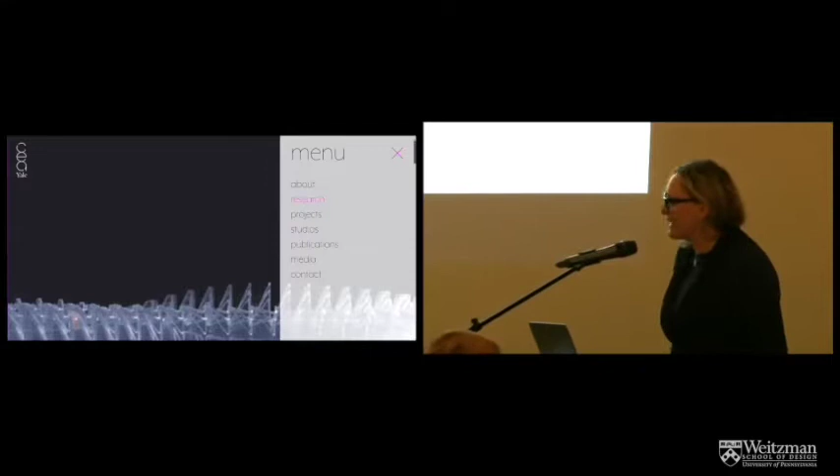Part of my mandate was really to introduce our new program, Yale CEA, the Center for Ecosystems and Architecture. We just changed the name to 'and Architecture,' but not in time for press. Yeah, it's one of these things when you have a startup. We haven't formally launched, but we would love for the folks at UPenn to know about us, because we consider you absolutely kindred spirits in so many different ways.

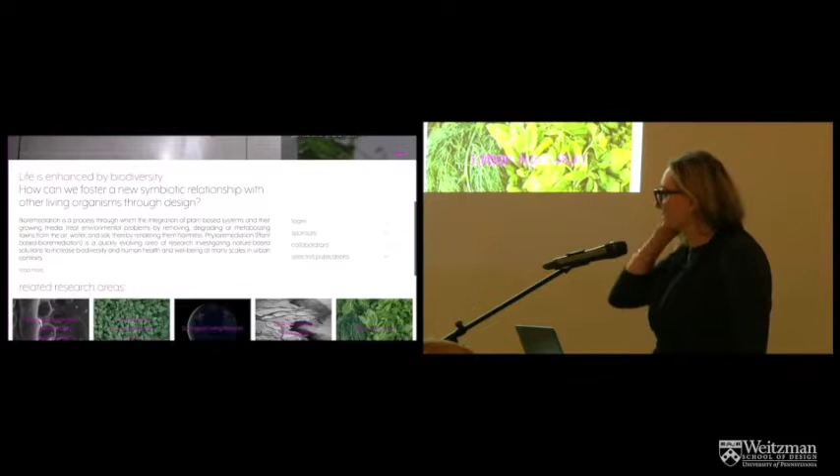So what are we trying to do here? As Vinka said in that incredible introduction, thank you so much, it's very comprehensive. In a nutshell, we're linking research areas that are ecosystemic with building projects. There's a relationship between scales where we're leveraging building projects in order to, as Vinka used the term, radically change something on an ecosystemic level, which is very hard to do within the budgetary and time constraints of practice and even of studios. We can change certain aspects, we can plug in certain components and parts, but to actually effectuate ecosystemic changes is extremely difficult.

But we still need the buildings, and this is why we're continuing what we did at CASE, per Vinka's introduction, to form an academic-industrial alliance in order to have multi-scalar and ecosystemic testing across a lot of different labs simultaneously, with data acquisition and lived experience in actual building systems. A lot of times, these are actually pictures from our old center, CASE on Wall Street, which was at Skidmore, Owings and Merrill.

What can we do with building and testing our systems? We have the so-called DNA of the built environment, and we don't mean it as a metaphor. We're serious about the fact that we need to start looking at even our mechanical and electrical systems through the lens of living systems behaviors. We have all these artifacts, and I'm going to talk about that towards the second half of the lecture.

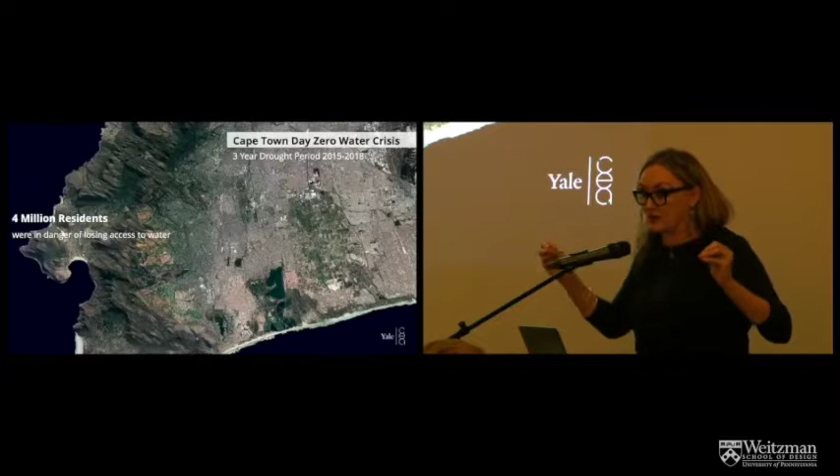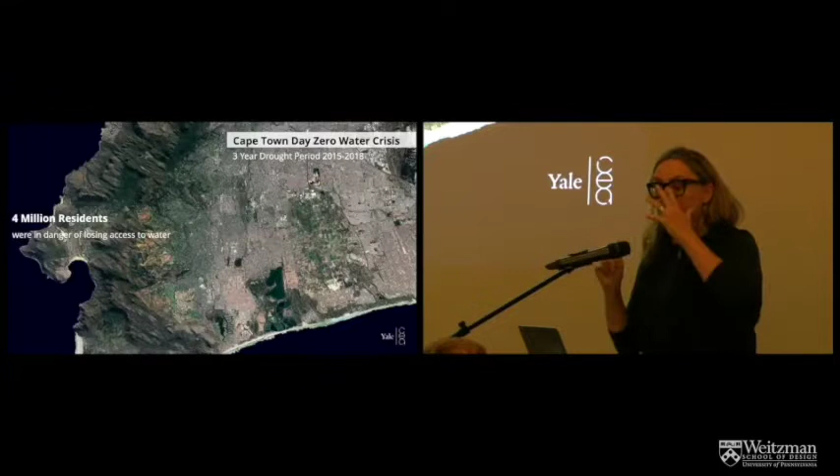I'm going to show this as a provocation just to show that we are always working with sites. As you all know, in architecture and ecology, we always have to think about the absolutely specific condition of sites. We also work generically, thinking about prototypical conditions that become transferable across sites that are very different.

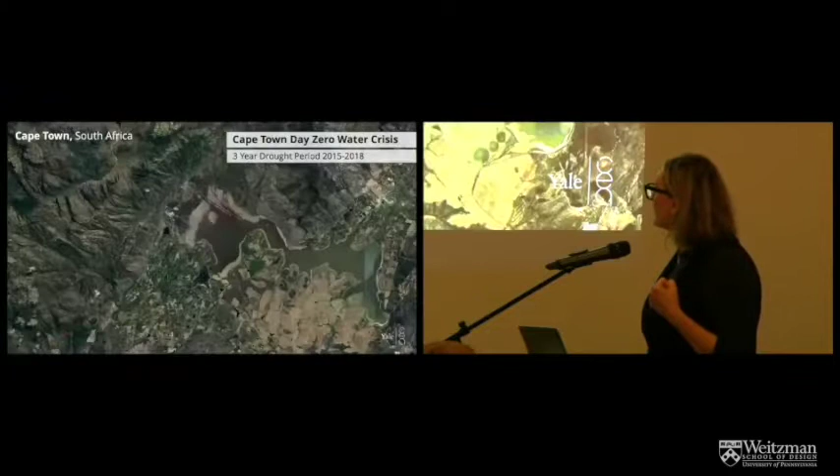In the context of Cape Town, we can see that a city of 4 million came very, very close to zero water, literally. Over the course of a 3-year period, the dependency on surface water conditions went from the upper left all the way across to the lower right. It's a massive change - imagine that within 3 years we have an ecosystem that will transform that quickly, one that 4 million people are completely dependent on for sustenance.

Cape Town is typical of a contemporary city where some of the residents - I don't know exactly what percentage - do have access to water piped into their residence, but we can see on the left-hand side there's a great variety of access to infrastructure. On the upper left we'd see a lot of access to infrastructure; on the lower left we'd see informal settlements that typify global cities worldwide, where you have tremendous rural-to-urban migration and inadequate infrastructure for sustenance.

And yet, in the run-up to almost Day Zero, it was narrowly averted. They ended up getting some water in and replenishment of the water table at a certain point, but we're talking only a few days.

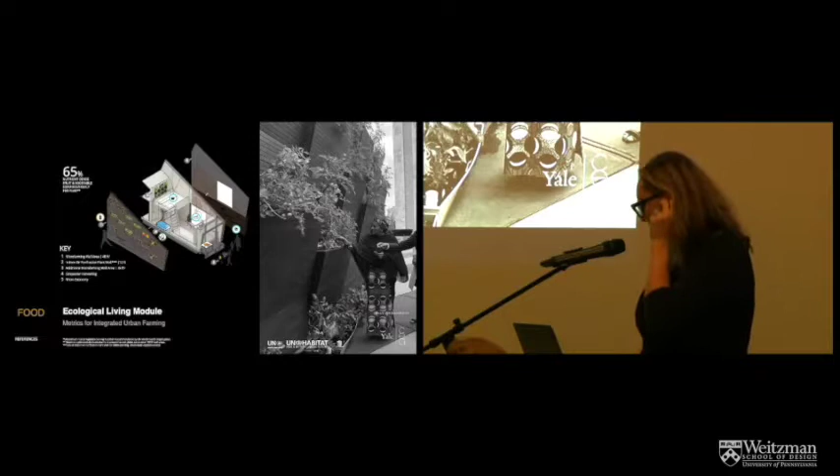This is just an example of an ecological living module, which I'll show you in a minute, actually geared more toward New York City. But in this case, we can see farm walls—this is backwards—that are used for all of the plant-based processes we're working with: purification of water, purification of air, delivery of food, in some cases delivery of disinfectants like hydrogen peroxide or other things, and of course the delivery of medicines.

So if you can see on the bottom, a lot of these very common plants, like St. John's wort, are ancient medicines. In Italy and Germany, and a lot of places, they've been using them for centuries, millennia actually, for certain conditions.

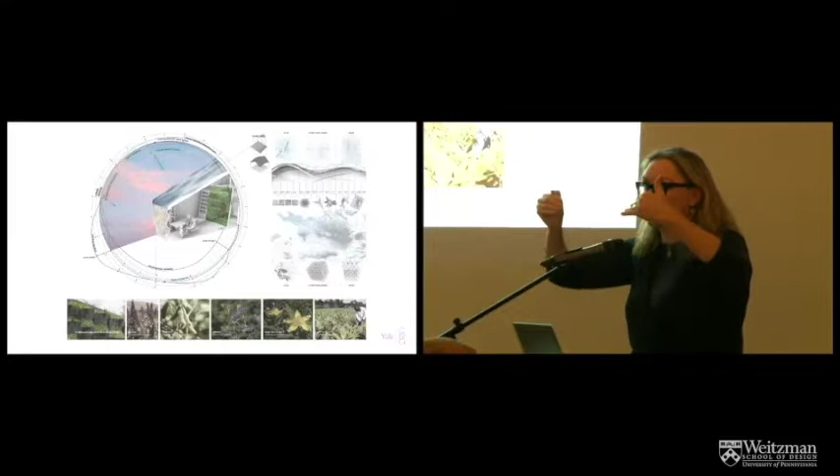But what we're doing here is, if you see like a fragment of an ecological living module, what we're always looking at is completely reimagining the interface between interior and exterior, no matter what climate we're in, even in an extreme climate.

I'll invite everybody to think about where their oxygen is coming from right now. Fun fact that we don't think about a lot, but please do think about it for a moment. That's a trick question I'll ask at the end. We can talk about that.

But basically, the whole idea is that we can test systems and materials. In the case of Cape Town, what we need to do, and what you're seeing on the upper right, is converting aquaculture waste from shellfish and other types of waste products in order to put into hydrogel-based systems to absorb water from the air. Cape Town is a good example of many climates worldwide, even in Mumbai, where we have big monsoons for nine months out of the year. That moisture is hanging in the air and is not coming down, and we need to be able to get that moisture and deliver it for potable and domestic water, as an example.

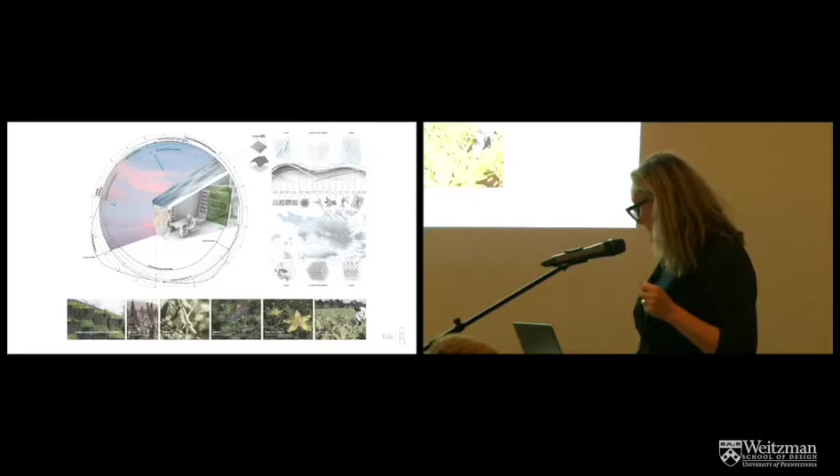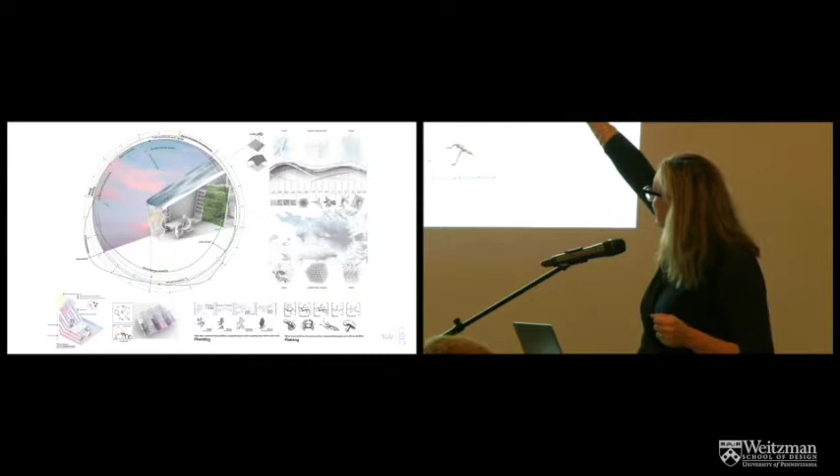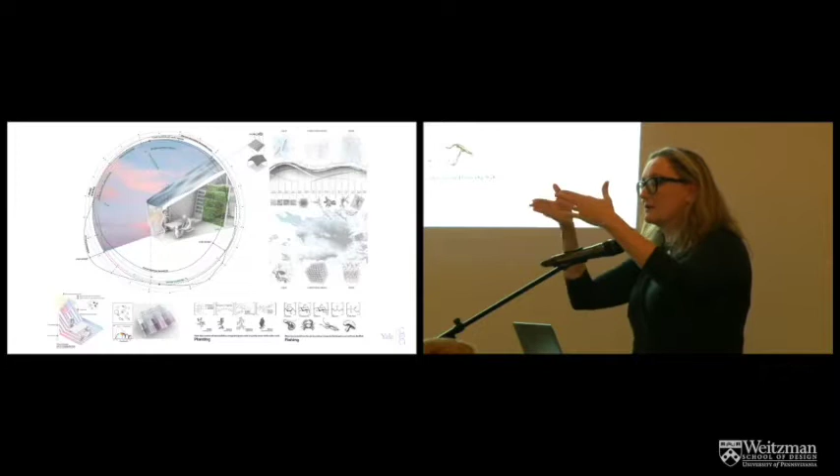And so how do we take, for example, these plants, like on the right-hand side—those are the sources for the hydrogels that are tested alongside that roofscape and absorbing it. The plantings in this particular case are going also into either roof, membrane, or facade membranes in order to work with solar in order to purify.

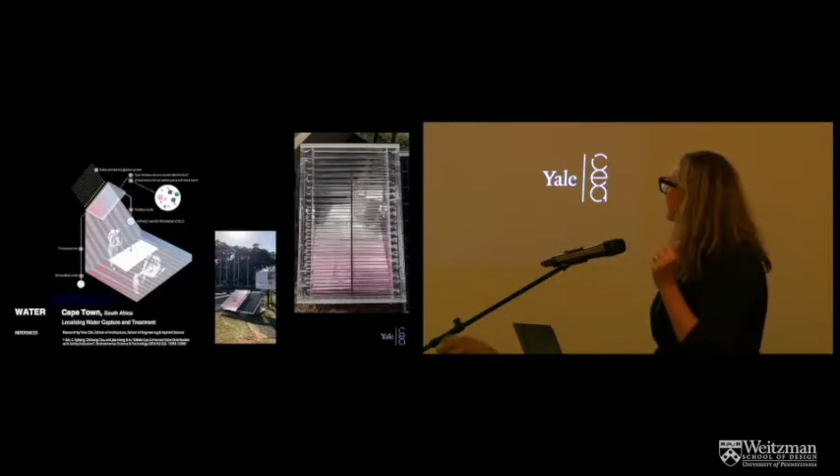And so we also do some really down and dirty prototypes that are not necessarily always that beautiful, but this is a good example on the right-hand side where we were demonstrating this in Cape Town. This is the purification of water just from the plant and the solar without any additional energy.

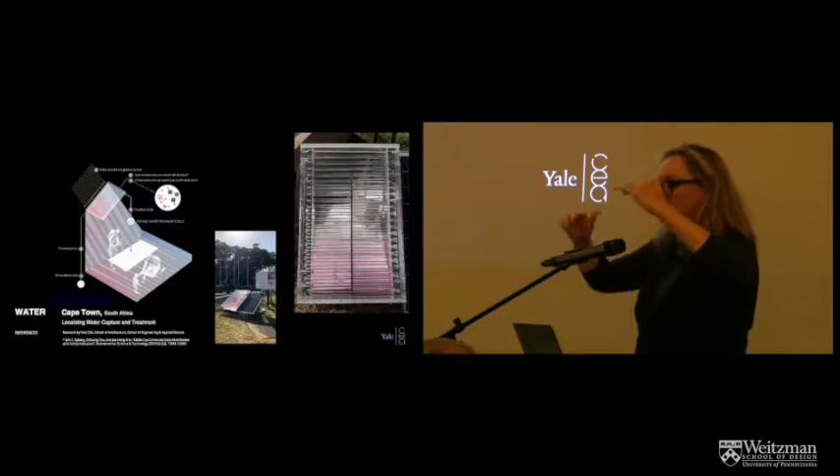And this one is using pumps and solar panels, but more recently—and we will be publishing this fall—a new system that doesn't use any external energy at all for the purification of water.

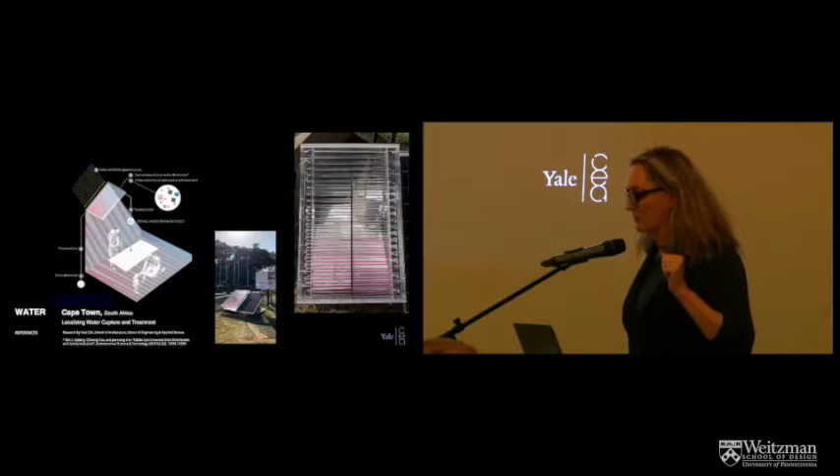And one of the things, obviously, if we're working in this context, is we have to work towards extremely low cost systems. So tubes and other things like you see here will probably be too expensive. But this is an earlier prototype that we showed and demonstrated also on the roof of the ELM a few years back.

A lot of times it's hard to show what can happen with an ecosystem, and as I said, we've got a lot of Frankenstein hybrids.

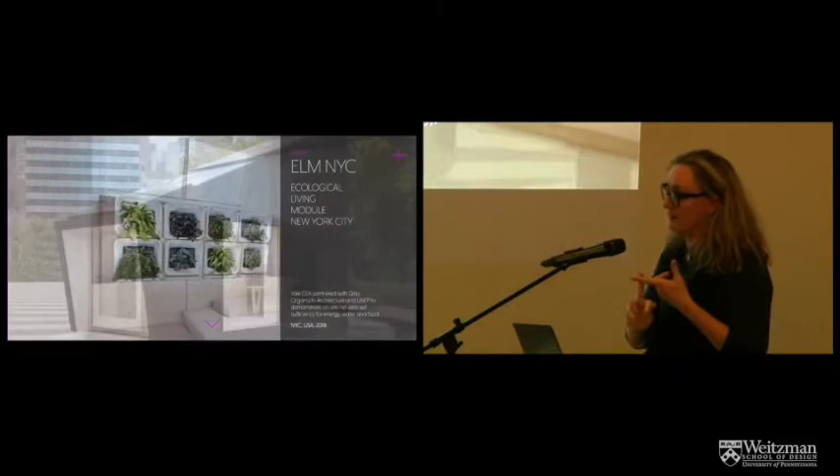This ELM in New York City, for example, is just using scrap, CLT, and other things that we had with Alan Organschi, Gray Organschi, and looking at how we can just make a very simple module that really can provide energy, water, clean air, clean water—actually purify the water—and enough food for a family of four. And in this case, literally, we're talking about 195 square feet, or 20 square meters.

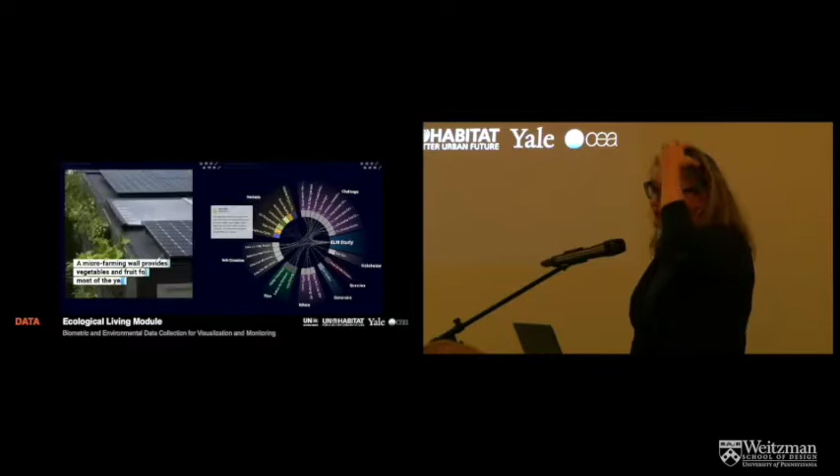That's the size, unfortunately, that is given to us by the UN. But we showed them, and this is like on the plaza in New York City as a kind of demonstration. We're not saying this is a solution by any means for anywhere, except that one moment of demonstration at the UN. So I want to be very clear that it's really important we're not saying in any way that you can transpose from one condition to another—that would be really extreme with bioclimatic design. If we really are talking about net zero, if we're really talking about sustenance, then there's an interfacial exchange across the building envelope that is absolutely geared to that one condition.

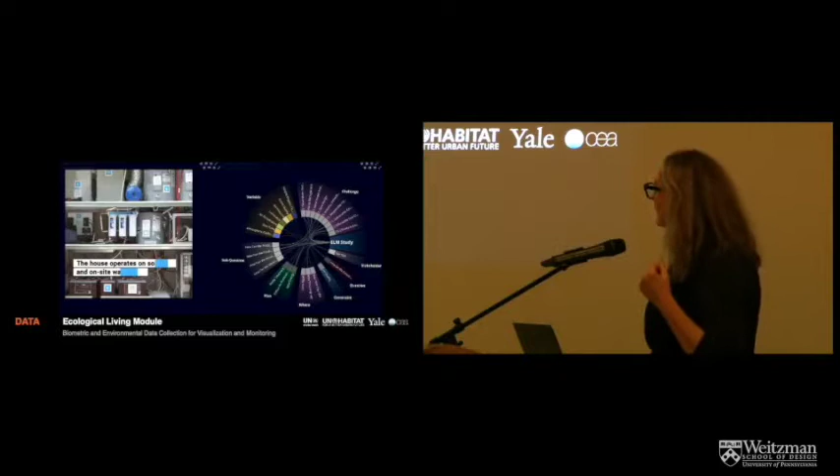But of course, we take a lot of data. We take a lot of data from human beings. How are they doing in this space? Where is all the material coming from? What is the life cycle? What is the impact on forests?

Fortunately, at Yale, we have an incredible School of Forestry that is now the School of the Environment. They changed the name too, recently. A lot of people are doing it these days.

But they're really looking at that interrelationship between, if we were going to go replace that concrete, steel, all of these things with bio, what happens when we scale up worldwide? There's a lot to think about there.

We are testing always incumbent systems with emerging systems. What you can see on the roof is a new system, and I'll talk about it a bit when we're looking at materials. I encourage you, if you're interested in solar, we have multiple systems, but this one is currently testing and we just demonstrated over 75% combined heat and power in renewable energy. The important thing is it's also modulating daylight and taking heat out, so it's passive and active.

When we're thinking ecosystemically, we're never thinking about something that's passive. I'm going to talk about this slide later on, so I'll just skip quickly to that.

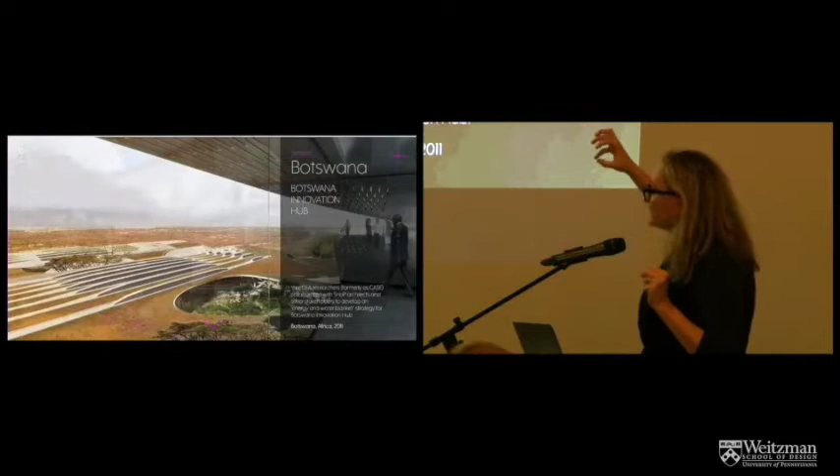If we're thinking about that context in South Africa and scaling up in a similar ecology - here this is Botswana, also quite water scarce, where we were working and there was no grid - this is where we leverage our relationship with AEC partners, in this case Skidmore, Owings and Merrill architects, to really look at how can we, once the train leaves the station and we've got to deliver a building, or in this case almost a district, really change the relationship to natural ecosystems.

Here we had incredible partners with the clients, because they literally did not want to tear down any trees. Their relationship to this landscape was profound, and we learned a lot from it. Here's just a rendering - we were working at the schematic design phase.

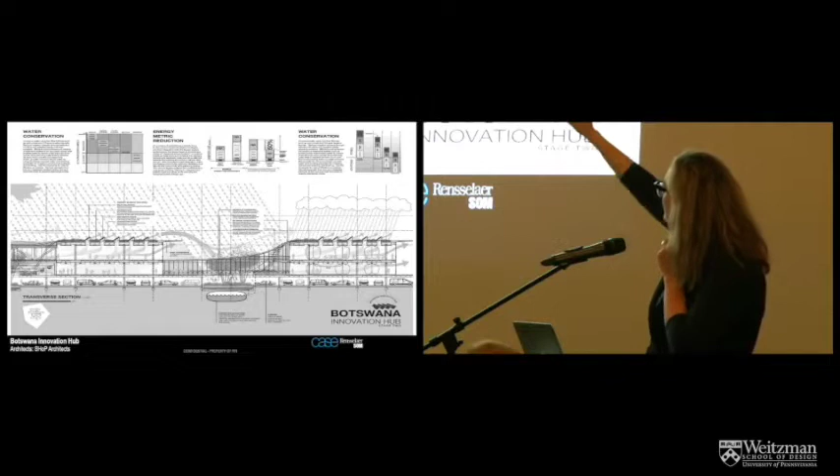We were lucky to talk to the architects and interface with them on the concept of an energy and water blanket, where the savanna would basically be pulled across, with pools of bioretention throughout. These clerestory windows also contain that solar facade system I just showed as a concept. You can see in a very early section this idea of the relationship between the energy and water nexus and what we could do with even intensifying it.

So you would have more water within these courtyards, preservation of water, and the growing of certain species because of being able to collect or concentrate water. You can see those in these clerestory windows, where we were visualizing that solar facade.

Unfortunately, that's under construction right now, and we're not scaled up with this technology enough to put it in these clerestories just yet. But what I learned so well from Skidmore, Owings and Merrill, working with the engineers - especially Bill Baker and others there - is that the architect probably wants to get every idea into one building. The idea was, if it's research, we leverage one building, and maybe it'll be three buildings later that we're able to get it into. I think that's a really, really important thing.

I'm showing those because architects increasingly want to read a lot of the scientific journals, and food for thought: the way and format in which we have to show a lot of that work is difficult for us. There's a lot we need to think about in terms of format and presentation, being able to, in a good way, learn each other's disciplines a bit, and have maybe more of our visuals and more of their metrics in the way we represent things.

But I think, like so many centers, we are working globally, and we work with AEC partners that work globally, and we can see this massive transformation of regional biomes.

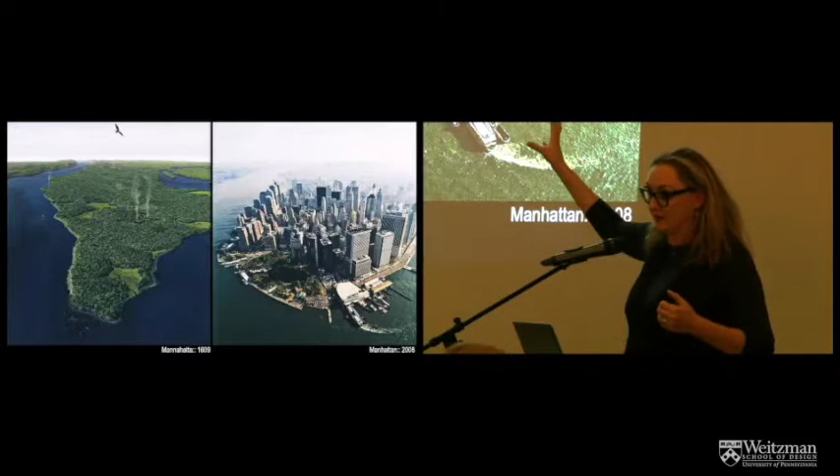It's very hard to live there for a lot of species. But if we look at the surface area, and all the different opportunities for niche conditions or other formations, we could potentially have net positive biodiversity in the city with this particular carcass, a pre-living carcass. We have humans and their parasites mostly here, and then radically cut definitions between where we designate that other living species and systems can coexist, very neatly defined.

But what happens when we start to actually design through the lens of other living systems? And what happens when we look at our own ecologies differently? This is called the global light pollution map on NASA's website, and of course this is a still from a live feed. But what if we think about that as a map of potential nighttime photosynthesis?

We can look at our things in very different ways, look at our artifacts differently, and we don't have to think about this either-or condition, either we are in ecosystems and non-human living systems as we've called them before. We can see that non-human is a term constantly used in our anthropocentric view of things.

But what happens if we start to think about a continuum of the ecologies? On the left-hand side, we have a massive degree of carbon mopping and sequestration with natural systems during the day, but we've also created a kind of diurnal condition where we have a tremendous amount of internal light and other things.

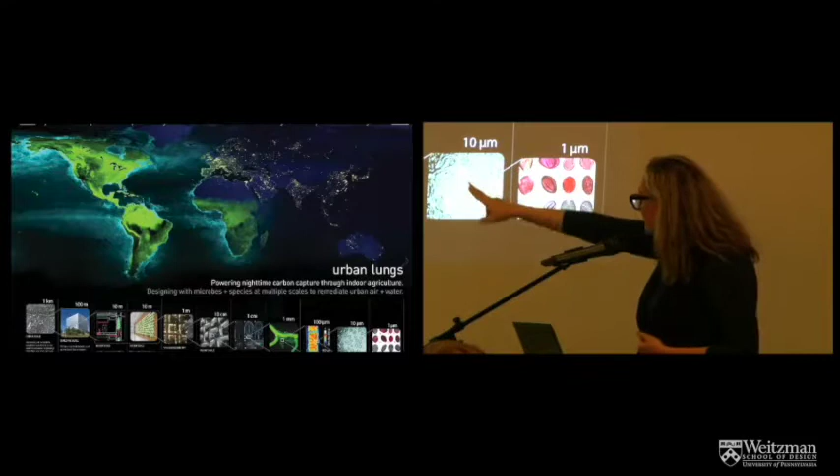If we look at design on a multi-scalar level, on the left-hand side is the project in the Bronx that Vinka mentioned, and we're starting to think about partnering, once again, with designers at each scale.

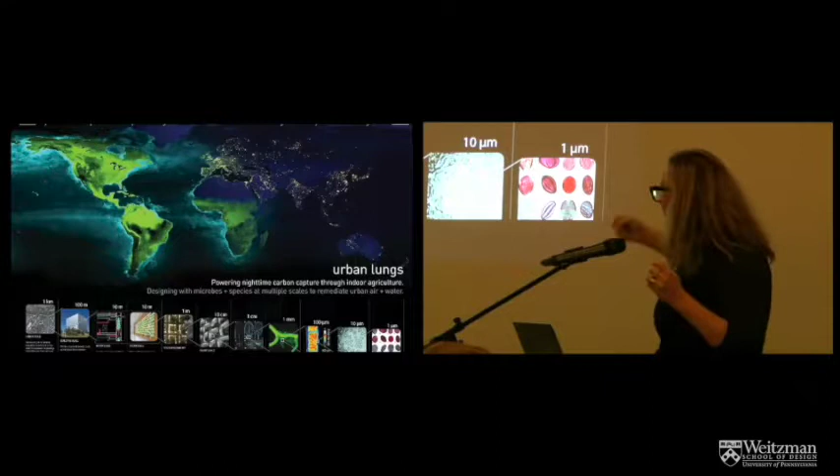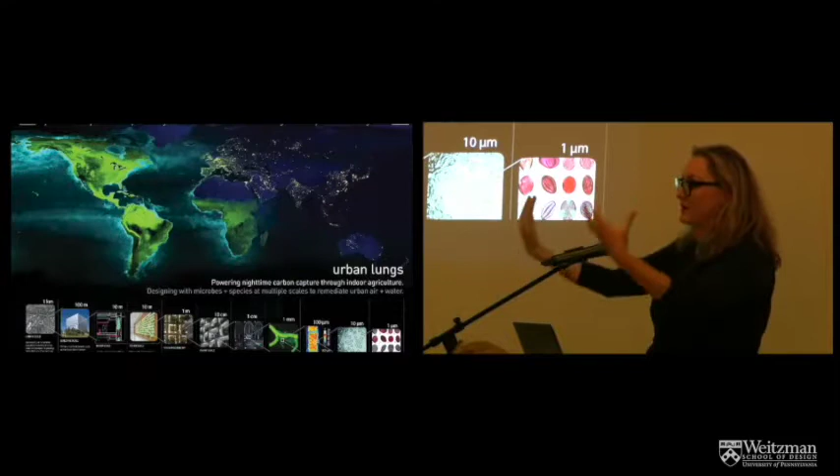We have designers of microbial ecologies in biotech, and designers of other mechanical and electrical systems. But if we start to think about that co-design, not just with other living systems but also across the disciplines, there's a way to think about our ecosystems very differently.

On the left-hand side is a section from a system we developed with Skidmore, Owings and Merrill many years ago, when I was at CASE and RPI. It's been evolving in terms of its morphology over the years, very slightly each time, through so many different criteria: airflow criteria, microbial criteria, soil design.

But at the same time we're evolving morphologies at that smaller scale, we're also inhabiting buildings that could be considered the epitome of a mechanical and electrical paradigm. Going back to this theme of ecology of fear, this Public Safety Answering Center Two was the building New York City built during the Bloomberg administration to be the redundant building in case we have a bioterror attack, a Fukushima, or a 9/11, since the command center for New York City was in the base of the buildings when they got hit.

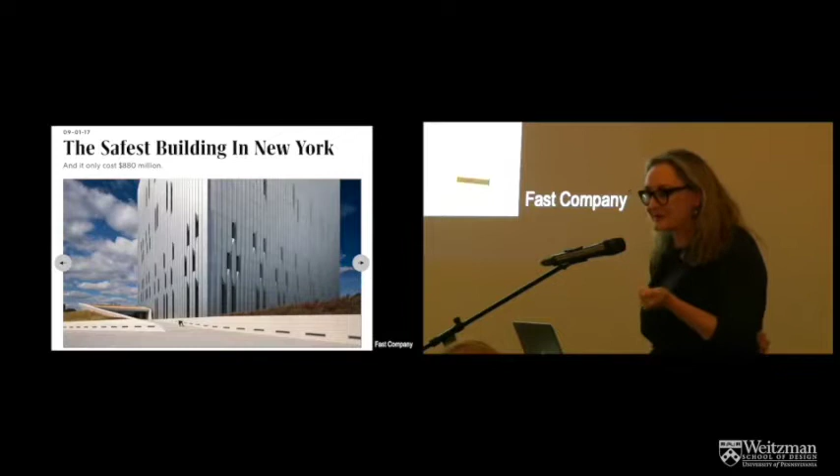I love this title from Fast Company, the safest building in New York. And you can imagine why they call it the safest building. It's blast proof.

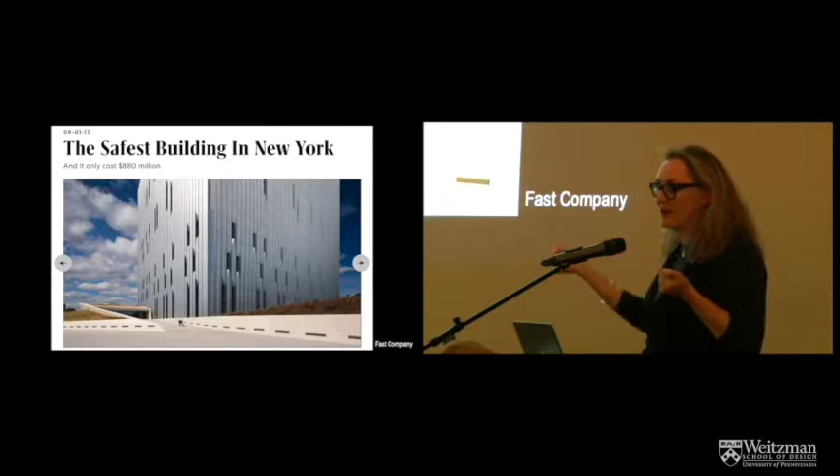You can shut off the fresh air intake in case of a bioterror event. It's got numerous safety features.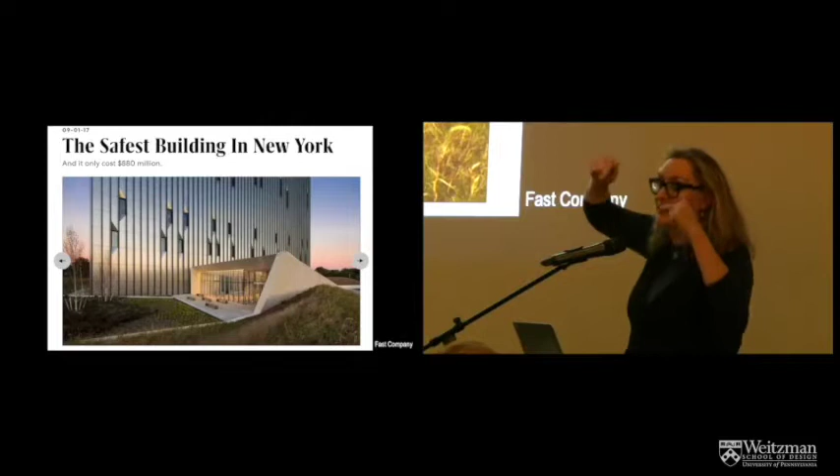Out of that 880 million, initially the budget was 1.2 billion with a B, and during the recession in 2008, it went all the way down to 400 and something million. We were shocked that our little piece of that was still in the budget. Why was our green wall still in the budget when the police and firemen did not have any lockers at one point? Now they do, thank goodness.

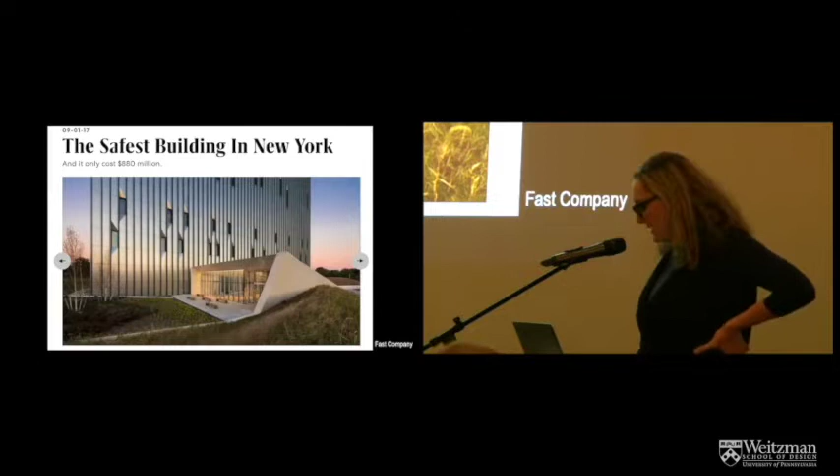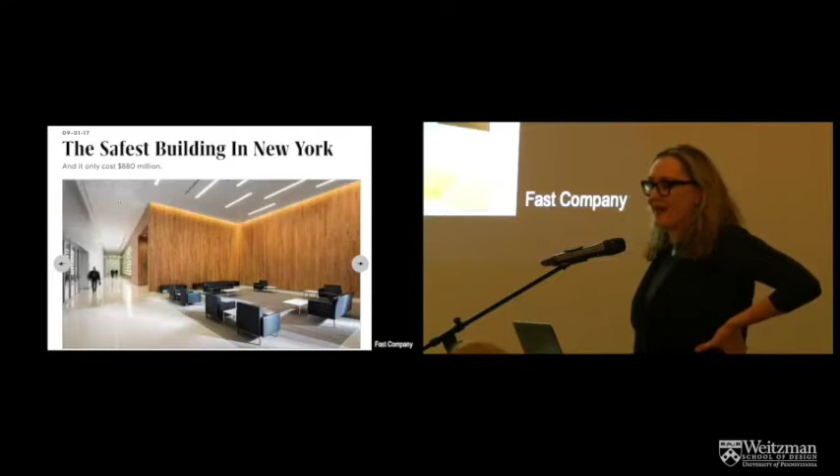We had a discussion very early on with the police and firemen, and we talked about air quality. The architects did not want us to talk about anything nasty, they didn't want us to be negative in any way, quote unquote. But we slipped in one slide with toxins, which I'm embarrassed to say I don't have here. But I think we know now, 10 years later, post-pandemic, we know everything that's being emitted here. We know that we're exchanging microbiome with everyone here over the course of an hour, so I'll try to keep my lecture to an hour.

We obviously have a tremendous amount of source emissions coming from the outside. We're mixing. Our air inside is only as good as our air outside, of course, as we know. But really what we were interested in here is, wow, they have to shut off the fresh air intake in case of a compromised event on the outside. What does that mean? How long do you think we can last on the inside of a building like this if we shut off the fresh air intake?

It's related to my earlier question about where our oxygen is coming from. Any guesses? Throw it out. We won't know who you are, so... two weeks? It's good, you would think we would be able to, right? Yeah, a few days. Yeah, so the safest building in the world. Yeah, and think about it. Yeah, okay, exactly.

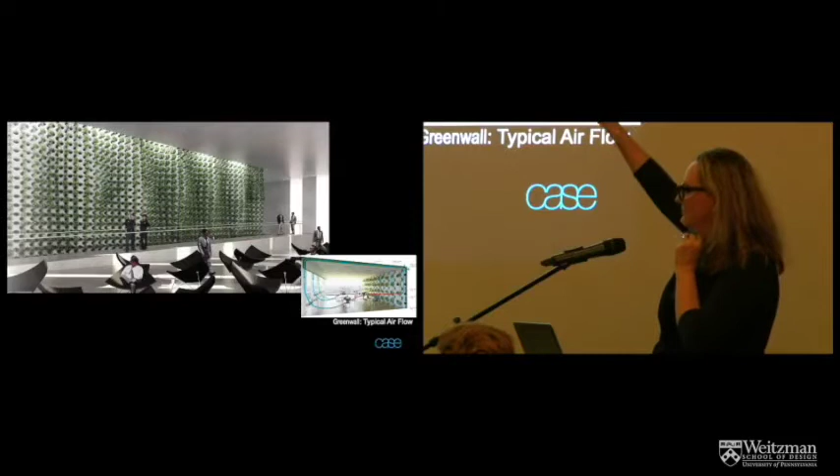I throw these in as relics of some of the things of how we thought the wall should look. Back there, you saw something where the architects had a lot of influence over how the wall would be produced and how it would look.

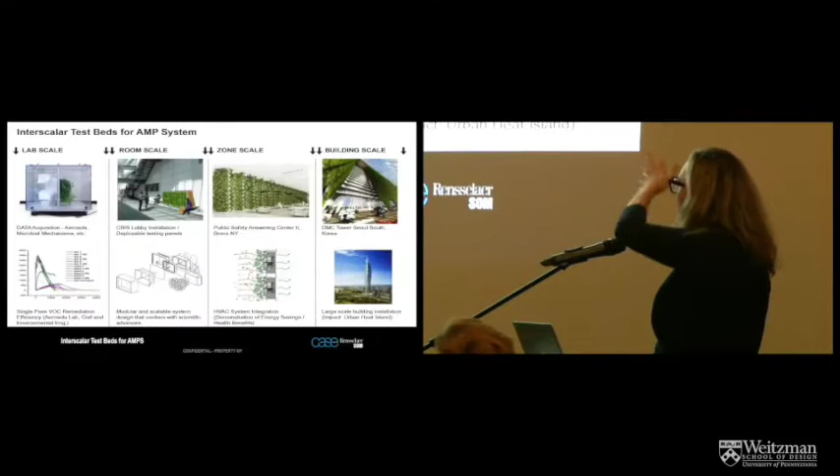We were very, very interested. There are all these relationships between lab and the data acquisition. There were a lot of prototypes built where we were testing on ourselves within rooms, this is at Skidmore, Owings and Merrill again, on Wall Street, where we have PhD students and master's students taking a tremendous amount of data and developing a lot of different types of designs.

But at the end of the day, what was so important, and where our colleagues from NASA come in, is that all of the work we're doing in this area does come from space and from studying what happens when you take a piece of Earth, i.e. ourselves, to Mars or the Moon, and you have to keep people alive. Turns out we don't know how to do it without plants for a long period of time. We could do it for a short period of time, but it will have a built-in expiration date at some point, if we're thinking in perpetuity.

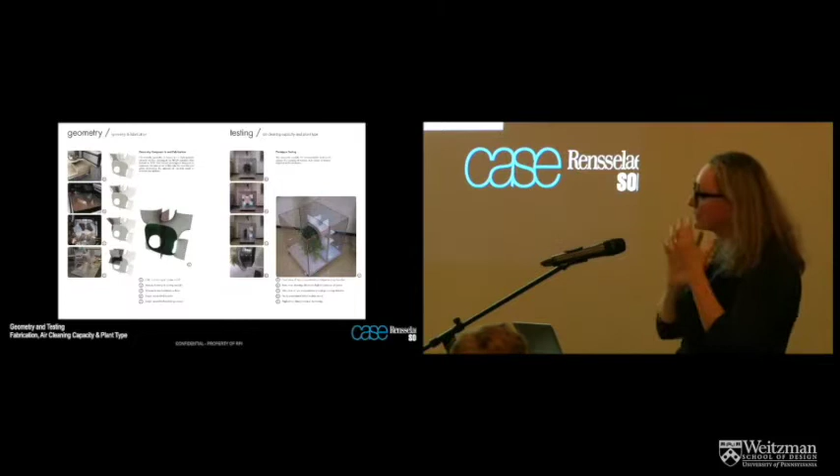A lot of this research does come from NASA and from the Biohome and other things, where after the 60s they thought they would be colonizing a lot of these outposts very quickly, but it turns out it's taking a lot longer. Science takes a long time.

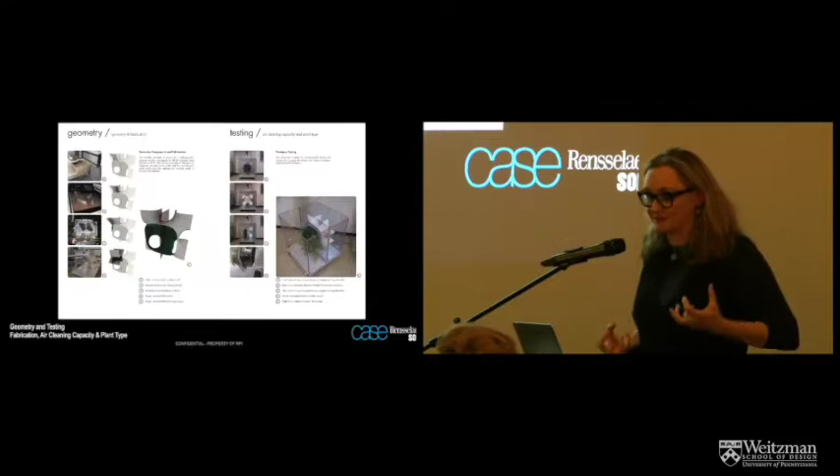But one of the really important things, where I think there's a nice carryover between architecture and art culture, was that at the same time as Erwin Hauer and others were studying minimal surfaces for artistic purposes, some of our collaborators in the department in mathematics and biology at NASA were looking at the emergence of those relationships from biological forms.

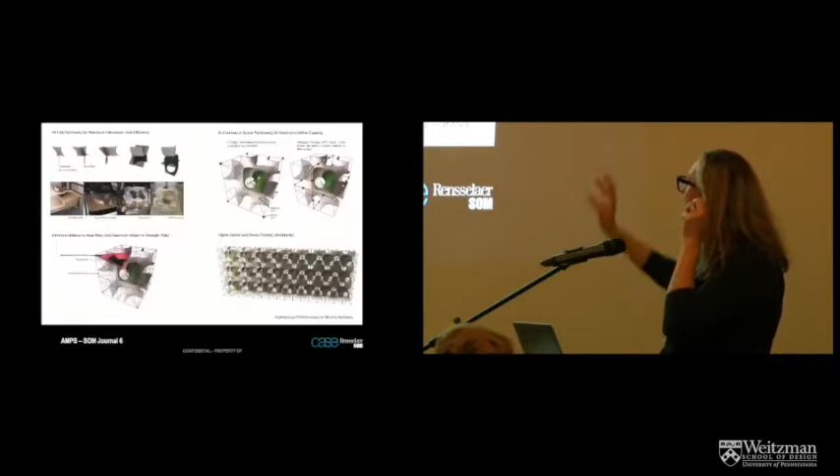One of the reasons why that was so important to us at the time is, in order to get the results we need, that mass balance between CO2 and oxygen in human-occupied spaces, and also to inoculate the microbiome with a healthy, external forest-type microbiome, we needed a lot of plant mass, and we needed to minimize structure.

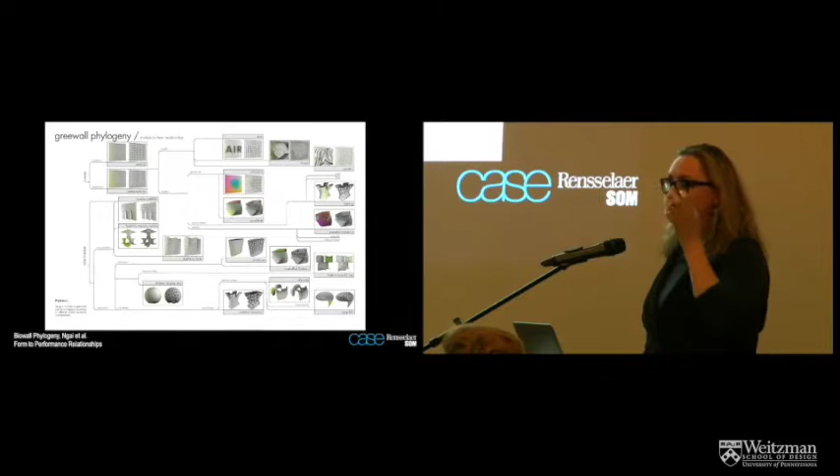So there were a lot of crossovers in how we could retrofit conditions or spaces with different double-sided walls where we would be packing a lot of biomass. What we're really doing here, and you can read more about it on our website, is using the root rhizosphere, the growing media within the roots and the microbes, to also reform VOC molecules and other chemistry. What we're going to be publishing in the next quarter is an inoculation of the microbiome.

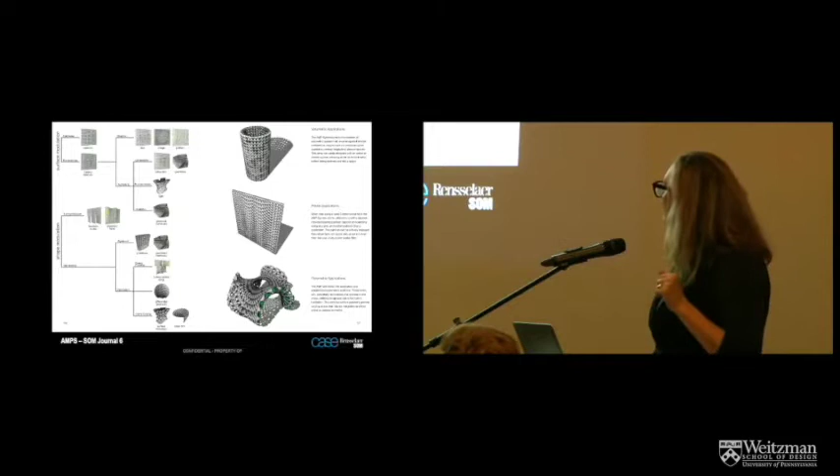Now, why is it important to reshape our interior microbiome? Well, it's only been a few hundred years since we've really been largely living most of our lives indoors. In a place like Philadelphia or New York City, we would live more than 95% probably on average indoors. It's a tremendous amount of time, and we're dramatically changing our immunity and health.

There's incredible data coming out from the so-called biodiversity hypothesis, that human health and immunity is actually related to the presence of rare flowering plants. That means you're not safe if you're in the suburbs, you're not safe even on farms. We're talking about the destruction of really critical types of ecologies, where the rare is critical to immunity. This is really emerging science.

In this case, we're testing all the way across, all the way down to the bottom, testing whether or not we can actually bring the level of living forest-type air and living water into a built environment through the processing.

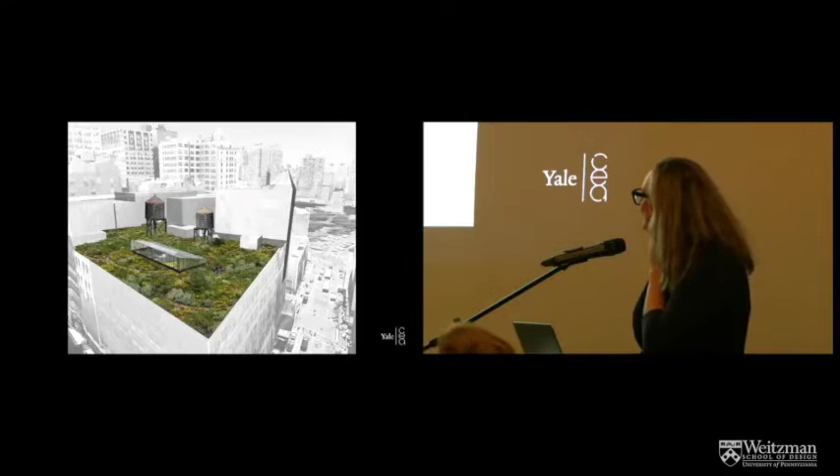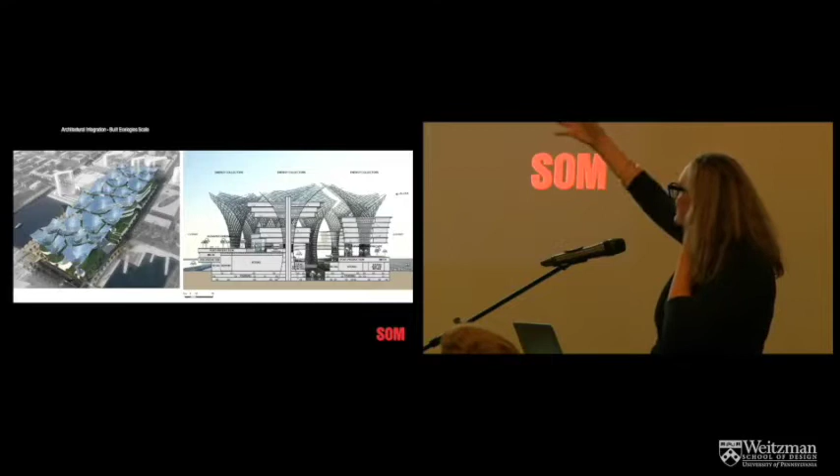Now in New York, we don't have that many ecosystem-scale sites to test on, so we have to take it where we can. But in our relationship with firms like SOM and others, they have massive district-scale projects. We had a whole city actually that we were visualizing with Buro Happold and others, an aerospace city in Abu Dhabi.

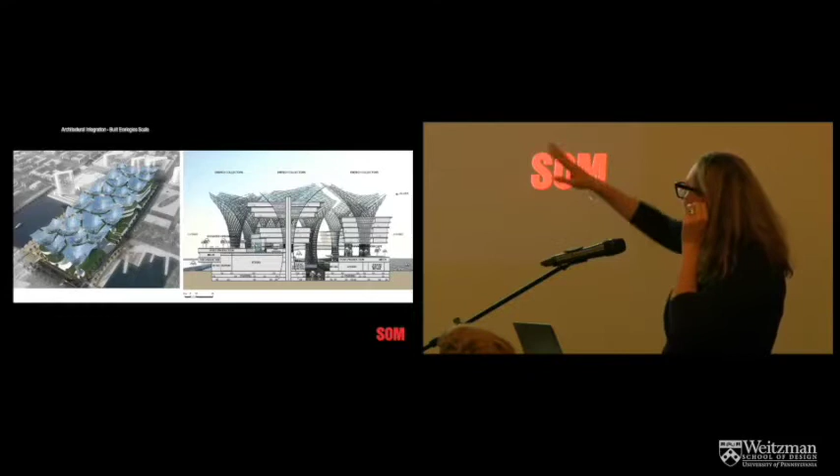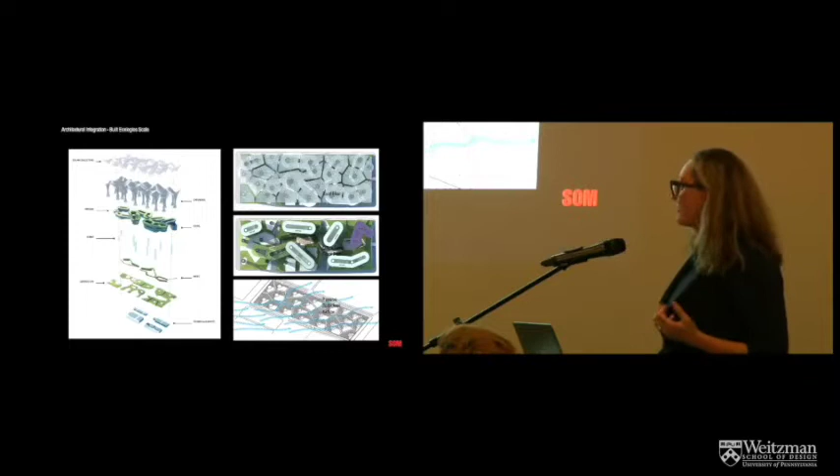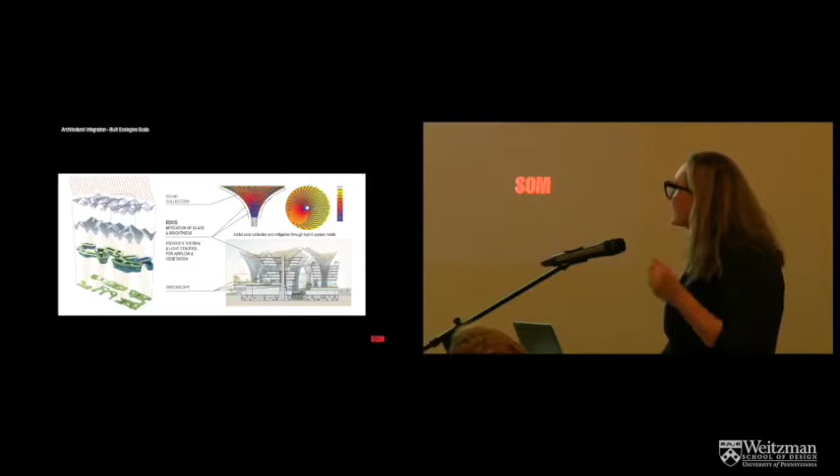This is looking at, in the Middle East, if you really had to completely change an ecology so that you had interior, exterior environments and were self-sustaining for energy, water, food, and other aspects, how could you do that at a district scale where you have peer-to-peer sharing and more opportunity for ecosystem relationships and sustenance without drawing from non-renewable resources.

If we're thinking about complete circular material economy or the development of ecosystems, this is a more near-term project, Sheikh Khalifa Medical City, where patients really can't go outdoors most of the year. Being able to take off all that heat and glare at the top with solar canopies that do purification of water and air and delivery of energy is critical, not just for the sustenance of the medical city, but so patients can be outside when the local temperature might be 110 degrees.

We were working on this with SOM. We actually started this project over 10 years ago, and recently it's on hold, but that's how a lot of architecture goes.

In this case, we can think about how rapidly our climate is changing and how much we are going to need to provide outdoor spaces that are viable.

So I'm just going to end with a sequence looking at our material culture and how we actually deliver materials in the environment.

This is just a snapshot of the Eames, Charles and Ray Eames, Powers of 10, one of my favorite artifacts of architecture, which happens to be a film. Definitely Google it if you haven't seen it—most of you probably have. Even if you've seen it, Google it again and watch it. It's an incredible treatise.

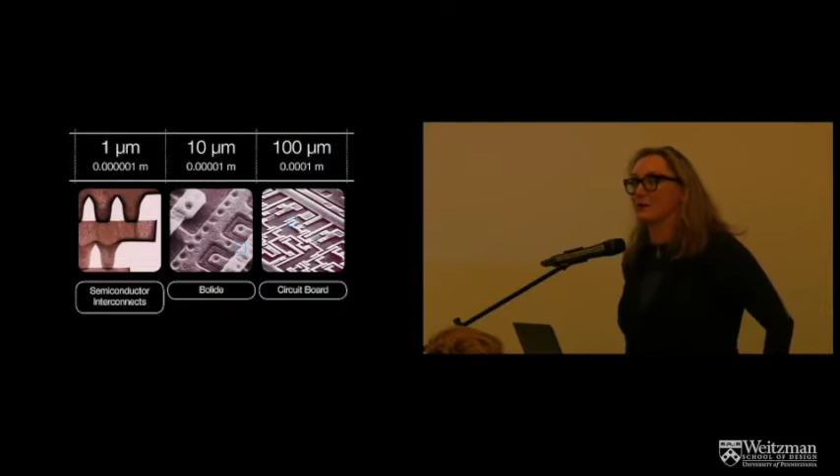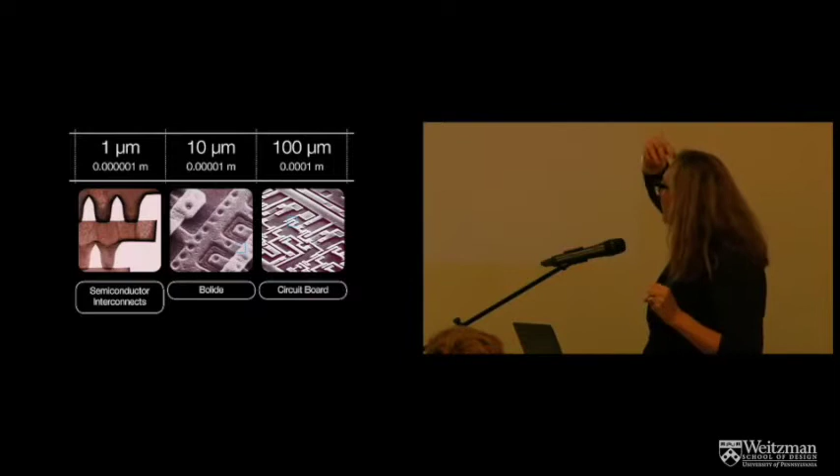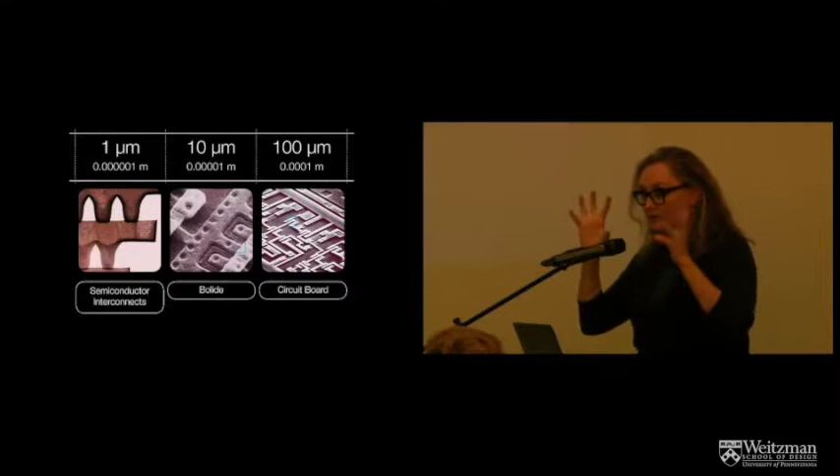We might have very sophisticated methods to manipulate those materials into those forms, but ultimately we are shaping materials into different forms for different processes. If we think about the semi-metals, the semiconductors, we literally have to go to 1100 degrees Celsius and back within a few seconds to make these technologies—so they're extremely energy intensive.

So to think about, are we using more and more energy? Yes, of course we are. But when we start to get down to this really small scale, the subatomic, or the molecular scale, we are actually flipping a paradigm to a certain extent. We have the potential to grow or to cultivate.

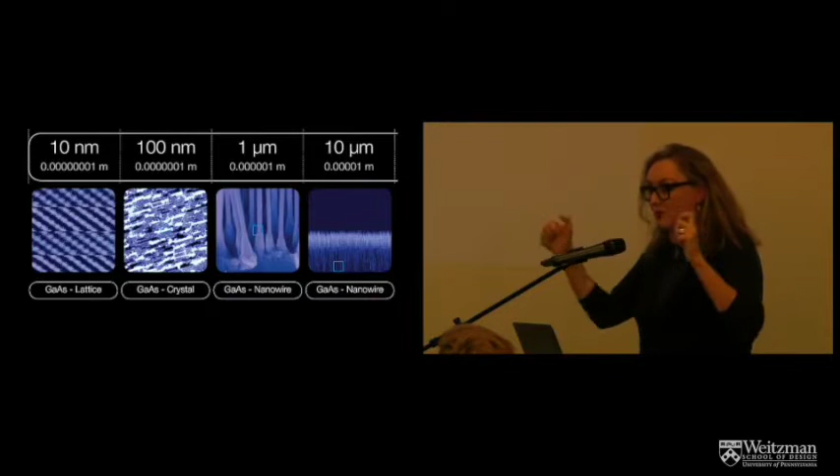But if we think about the fact that we are in this extractive material economy at every scale, we can start to think about these things ecosystemically. They do behave in a way ecosystemically along biological paradigms, because even though this is mechanical and electrical, the way it's metabolizing energy through the system is, in a sense, ecosystemic in spirit, but not ecosystemic in material.

I want to transition a bit to this issue of how we truly get towards circular material economies, where we're not just cutting down trees to make things, or growing processes that are extra- or pre-human, like timber products or agricultural products. Obviously we can think of agriculture as a biotechnology, but how do we start to think about growing across those scales simultaneously so we can truly participate in a biocompatible and circular material economy?

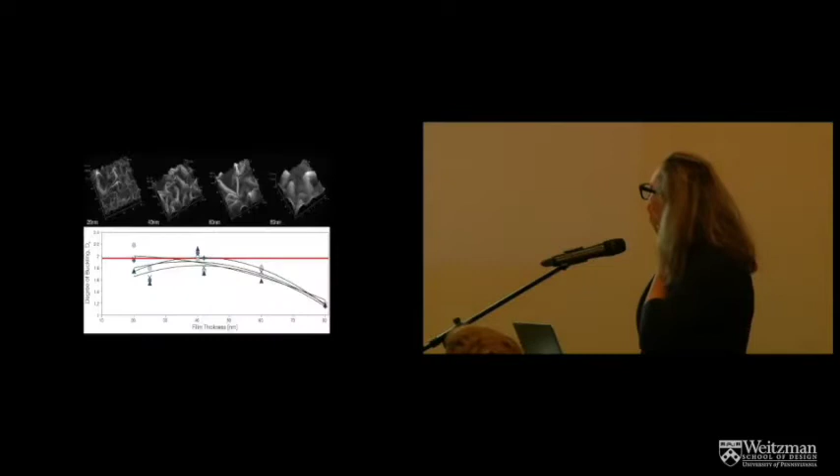That advanced materials frontispiece you saw is really looking at, once again, going down to the subatomic level, the crinkling of graphene so we can change the optical properties of our facades. That means we can disassociate what something looks like from how it's behaving energetically. It's a very important concept for what we need to do in architecture if we're going to be harnessing these things.

And also looking at having multiple handles on the energy flows so we can potentially collect energy, purify water, and do many things in terms of that transfer.

So thinking about, as an example, what if this facade was completely transparent, but it's stopping solar heat gain? We can disassociate those relationships, integrating the idea that, the last one was for Andrew, but this one is obviously for Bill. Bill can tell you a lot more about energy than I can, that's for sure. He's a real scholar in this area.

So I don't want to embarrass myself, except to say that this issue of having concentrated energy, as we might have, for example, if you look at a tree, the leaves and the branches and all the different aspects before you get to a trunk.

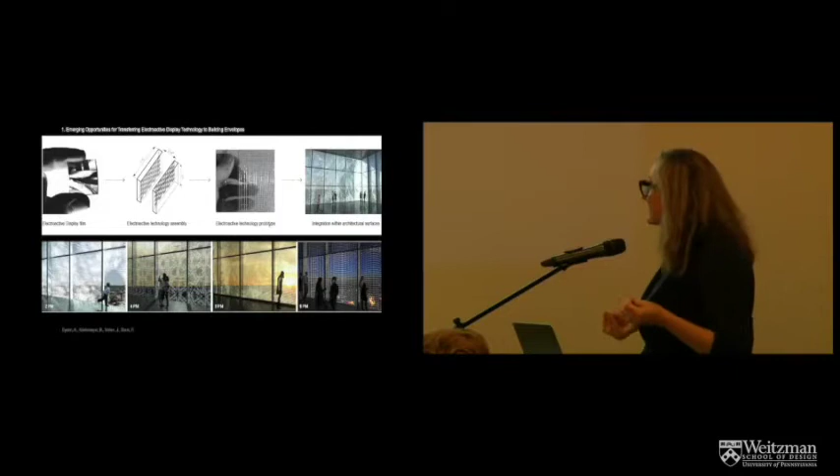A lot of what I just showed you with the Integrated Concentrating Solar Facade system and all of those different mechanical and electrical functions really need to be, in a sense, embedded within the materials themselves. So if we have a piece of clear plastic, how many things can that clear plastic do, if we're starting to embed the plumbing, the mechanical, the electrical, and other things within, once again, at the subatomic level.

One of the things that as we are parallel tracking with the different materials that we're working with, as architects, and maybe even just any type of scholar, probably wants to look at and visualize what they're doing in a way that might be inhabitable. So we're creating simultaneously virtual environments where we can start to travel down scales, and travel across domains and disciplines, and be able to simulate other ecosystems in our lab.

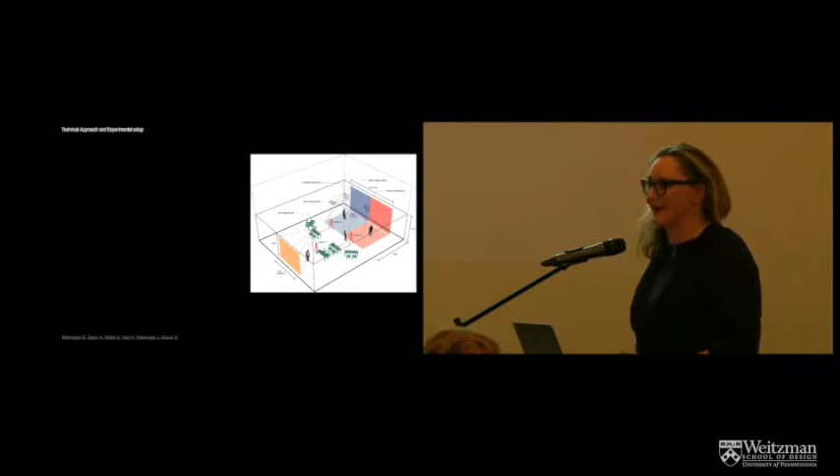So we're in the process of developing, this is still visualizing from my last appointment, these are visualizations from the EMPAC at RPI.

What you just saw there is getting a bunch of multidisciplinary folks together. This happens to be for Smart Geometry, but we got a lot of different engineers, biomedical, cognitive scientists, other materials and facade engineers, and building professionals, obviously architects, into the room to play virtually with our systems, our material systems, which at the moment are only at small scale.

I mean, we have prototypes, actually I don't have them here, but I think they're on our website. We have some prototypes that are getting bigger and bigger, sort of the scale of maybe a small window pane. But a lot of the work we're doing in the lab with the chemists and material scientists is really, really small. So how can we visualize what the potential is?

One of the reasons we think it's really important, not just to see what we can do, but also if we have so-called bioresponsive systems that can respond to a lot of different criteria, what will emerge? What we found out when this is a still, and we blew the pixels up huge, is that in many cases these pixels can, in this case electroactive polymers, be very small, like a kind of movable frit, or completely imperceptible.

But what we found out is if many people put their criteria in, let's say 10 different people, we saw these biomorphic patterns emerging. And I think this is a huge social question for emerging ecologies. If we have emerging ecologies that are bioresponsive, who gets to decide what things look like or how they are—creating space, perception, emotions, culture, iconography, information exchange, god forbid advertising. Any of these things could be harnessed by these kinds of technologies.

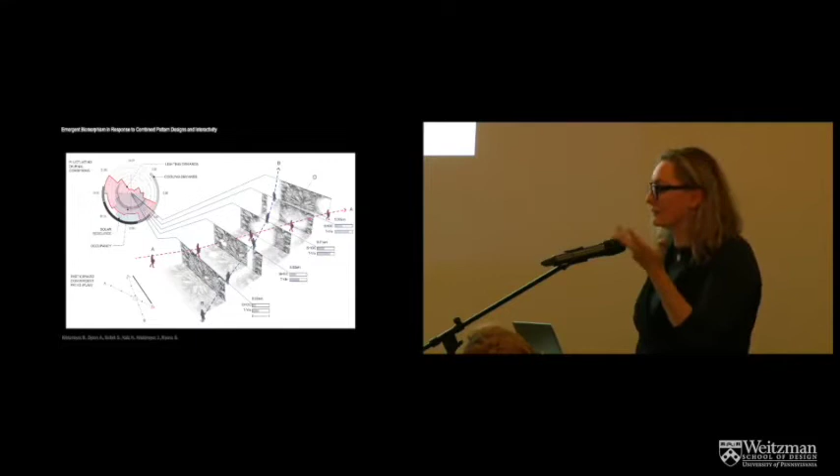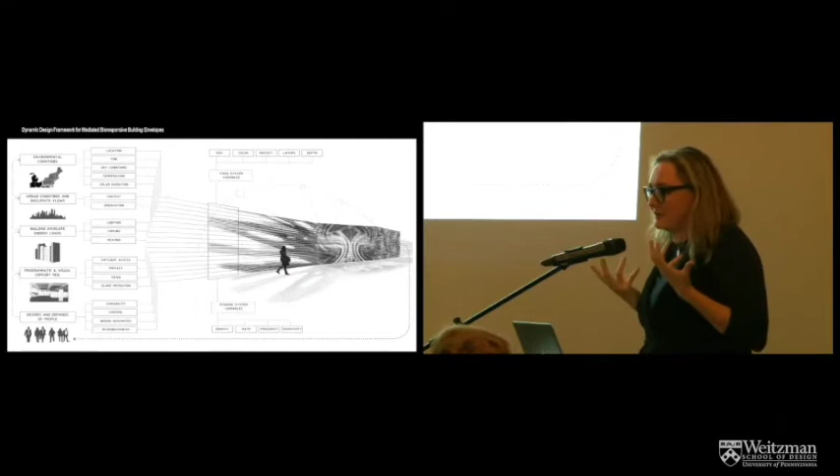That was really interesting to see: when many different overriding criteria come in—environmental conditions, urban conditions, building envelope, pragmatic and visual, and then the desires and demands of people, which we probably should have up top, and which can be completely non-technical—all of a sudden these unidentifiable patterns start to emerge.

Another interesting thing, and these are really old panels on the right-hand side, from work that is several years back. You can see how, if we have real-time feedback, we can understand the implications of our decisions. We've developed that a lot further with ELM and other things, really understanding how much energy, the U value, R value, solar heat gain coefficient, et cetera, of these systems when we choose certain things.

What's really important is we're experimenting with these dynamic conditions not necessarily for the sake of it—there's not necessarily a technophilic aspect to it. It is really driven a lot, in our case, by the environmental criteria. But of course there is a huge aspect that is cultural and really important. If we just look at the environmental for a moment, think about today in Philly.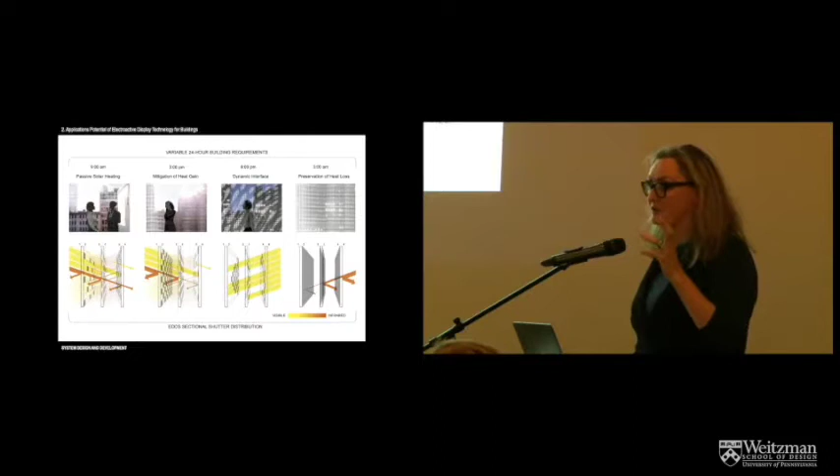Think about Philly in two months. In the morning it's cold, so you need a little bit of passive heating. By the afternoon you're probably in cooling mode, and maybe even within one hour in a building like this, with all the activities, you'll switch from heating degree to cooling degree. Then at a certain point you might want a dynamic interface at night, to preserve heat loss in November or December.

And then we're not even talking about all the different preferences or criteria that might be social. Of course there's economic, ecological, socio-cognitive, and the rest. So this is a short list, actually. It looks like a big list of different criteria for what a facade or building envelope needs to do, but it's really a very short list.

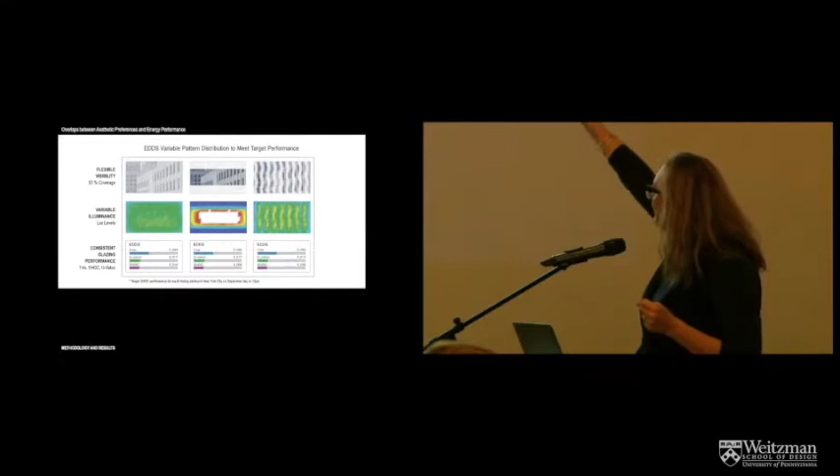I just throw this up to show that with a dynamic facade that would, let's say, be a frit, a stationary frit is only optimizable for one moment out of the year. But now we can see in the third row, all three patterns are having the same solar heat gain coefficient.

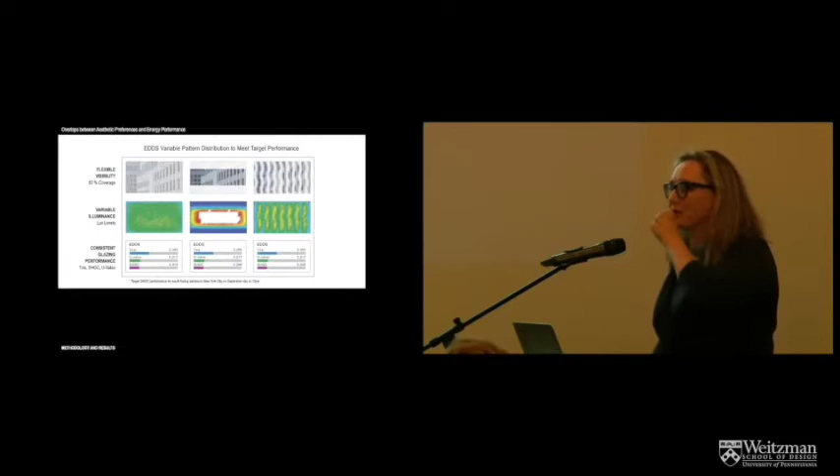So it's not true at all that this fear, I should have said there's ecology of fear, which I'm going to still talk about towards the end, but there's also fear of ecology. There's tremendous fear that I could say the DNA of that goes back to my own school when Paul Rudolph basically said that the School of Architecture was in the arts campus. They were not scientists, and didn't have anything to do with the environmental design that the mid-moderns like Neutra, Corb, Kahn, Wright, and everyone were obsessed with.

Rudolph did a wonderful job. He was a genius at pastiche and at sculpture, so he took everything from Wright and Corb in terms of the formalities. But the truth is, many of those formal conditions were driven by bioclimatic considerations in the 40s and 50s with those protagonists.

What I wanted to say is that in our profession we have seen a massive schism between so-called building science pursuits, or the technical aspects, and ecological considerations, and social, theoretical, and aesthetic concerns within architecture. And that is deep. It goes back decades. I believe a lot of that fear came in the 60s from a concern about scientific determinism, or an idea that somehow there would be a right and a wrong way, or a certain form that would be solar optimized.

We all know that we can never talk about the word optimization in architecture. There's no such thing as optimization, and I just threw up that slide of those three different patterns as an example to show it could be infinite how many patterns might have that exact same solar heat gain coefficient. So let's not worry about optimization for one thing or another.

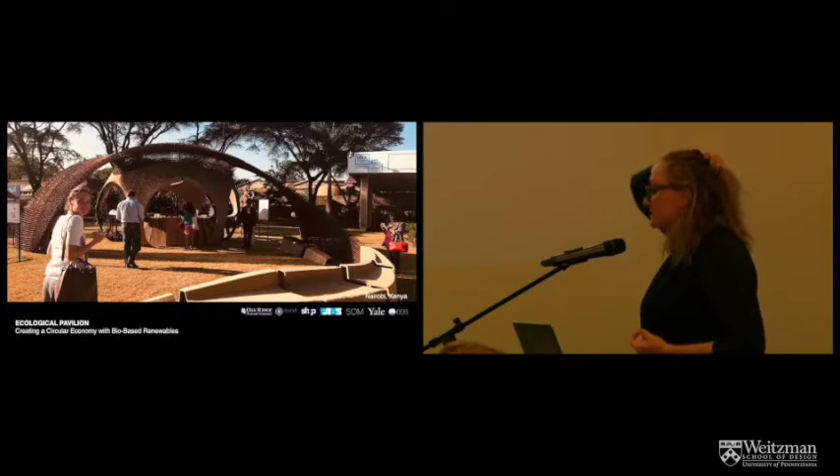In this case, this was an experiment with Oak Ridge National Lab, Branch Technologies, and SHoP Architects, using what can be characterized as a kind of detritus from bamboo. So, any type of biomaterial can be used to print with. That large arch is actually printed bamboo.

But if you think about the idea that we might be able to print through solar means on the side of, let's say, farms or forests, a tremendous amount of forest fires worldwide are caused by, or are fueled by, forest detritus that we might be able to cull and really change the profile of forest fires worldwide. Half of Africa, sometimes it seems like, is burning at some point, with all of that fuel that could potentially be repurposed towards something else.

If we think about post-agricultural waste, we have 5 billion tons in the Global South alone that is produced annually that gets dumped or burnt. And when it gets burnt, we're talking about a massive amount of greenhouse gases that go up into the air, and terrible air quality for those that live there.

So we're looking at how we can potentially completely change that paradigm of not just the extractive material paradigm of heat, beat, treat, and discard of non-renewables, but how can we also look at changing that paradigm of having to be straitjacketed by a factory, for prefab, where time and space and money, or labor, and energy are all costs to the system.